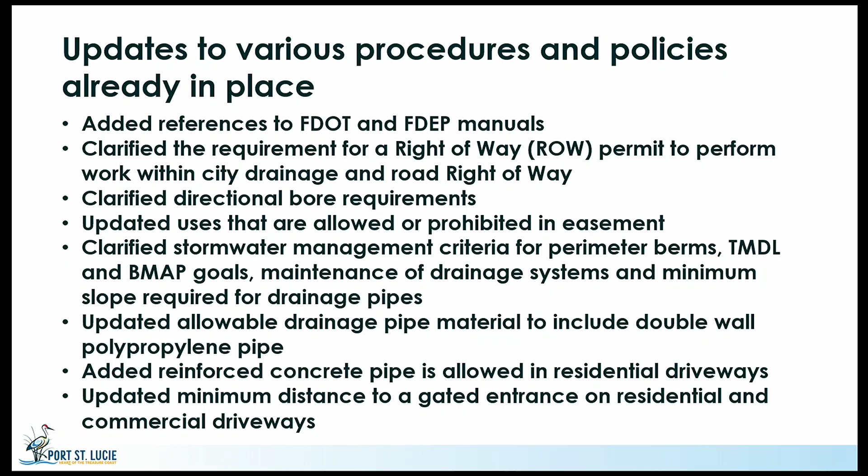The significant changes to roadways, I'm just going to go through various sections. So for instance, this slide shows section 8.3, which is the network requirements. It provides a revision to roadway network requirements. So new roadways shall be extended to the parcel boundaries, and new developments need to connect to existing roadways.

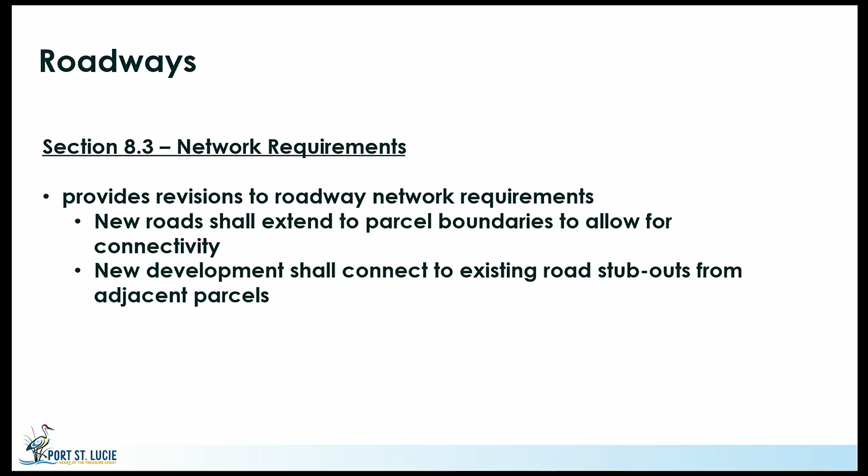Section 8.6, which is a roadway cross-section, we have updates to that to encourage using the average daily trips for roadway classifications, and also provides multimodal requirements by roadway classification.

The pavement design in section 8.7, we added clarification to adjustments to asphalt base and subgrade thickness. We've had that as a requirement for each of those, but sometimes we've noticed that depending on some designs, either thicker asphalt or adjustment to the base was needed, so we've made some clarification on there.

And we also added the minimum structural number for a temporary parking lot as 1.61.

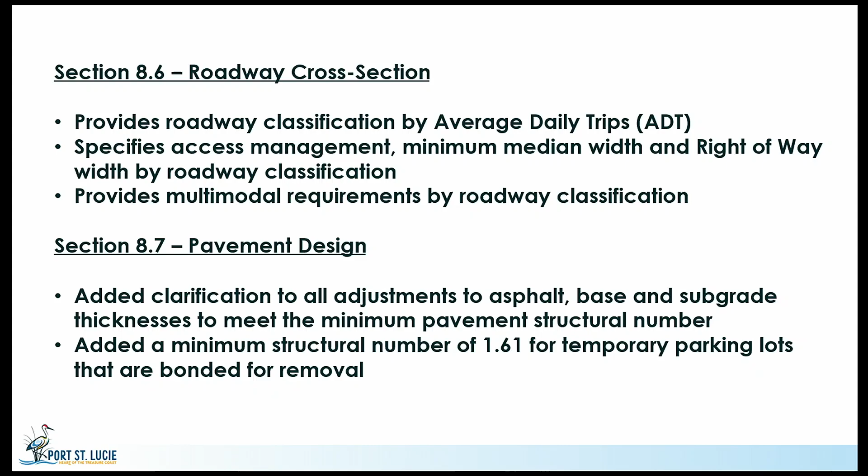In this roadway section for medians, we have 4-lane roadway, and any roadway with a design speed of 35 miles per hour or greater is going to require a median. And we also updated the 2-foot paver band, which was called for before. We've changed that to a 2-foot wide concrete band and provide the color and pattern for that concrete band.

Section 8.10 and 8.11 is the intersections and modern roundabouts. We've updated the reference to FDOT design manual, intersection control evaluation manual, and the FDOT NCHRP report 672.

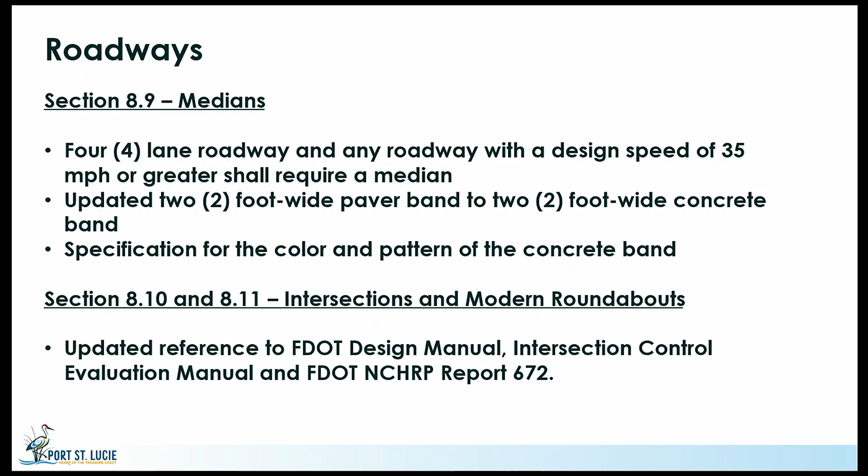On the driveways, section 8.12, we've added that the street light is required when connecting a driveway to a collector or arterial roadway.

Irrigation sleeves is required for all driveways within a public roadway.

We updated the FDOT standard plan index for driveway geometry, updated the requirements for tooled joints on concrete sidewalks. We also added the requirements for forming the residential concrete driveway, including saw cutting the existing edge of asphalt, and providing hot mix asphalt repair. That's primarily on residential driveways.

We added code reference for the number of access points required for residential subdivision, and we also updated the NCHRP reference for left turn lanes.

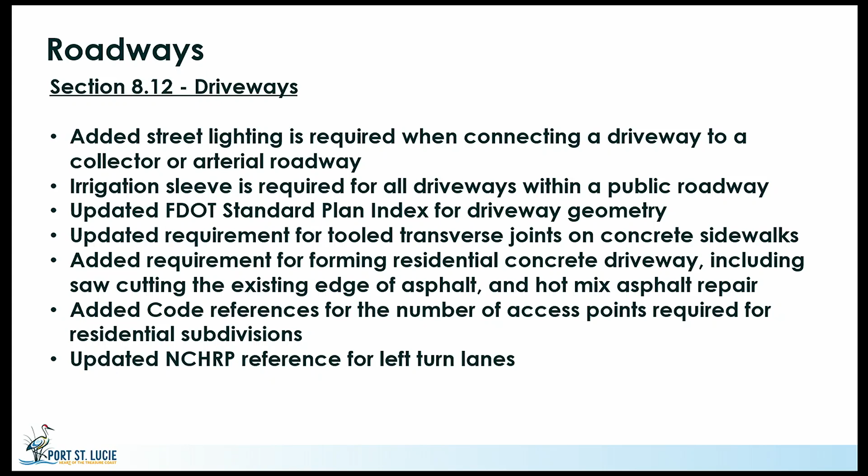On the sidewalks, which is section 8.15, we clarified the minimum sidewalk width if a sidewalk is located adjacent to the back of curb or the edge of pavement.

We also added a minimum thickness for concrete sidewalks within 5 foot of a driveway and within the access crossings to utilities or stormwater management facilities.

We added a 4-foot minimum sidewalk width for curb ramps, landings, and sidewalk crossing driveways. Also mentioned the transverse joints is supposed to be tooled, not saw cut.

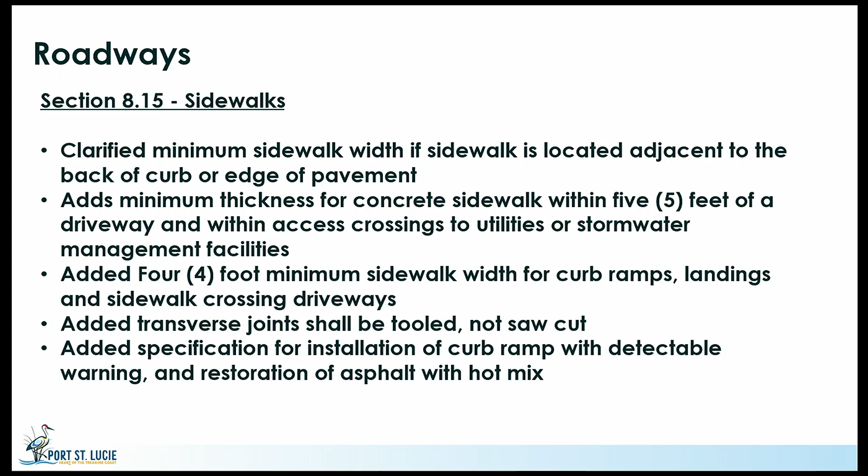And added specifications for installation of curb ramps with detectable warnings and restoration of asphalt.

And finally, on roadways, the mobility plan, we added a section, that's the new section, mobility plan, and the link to the city's website.

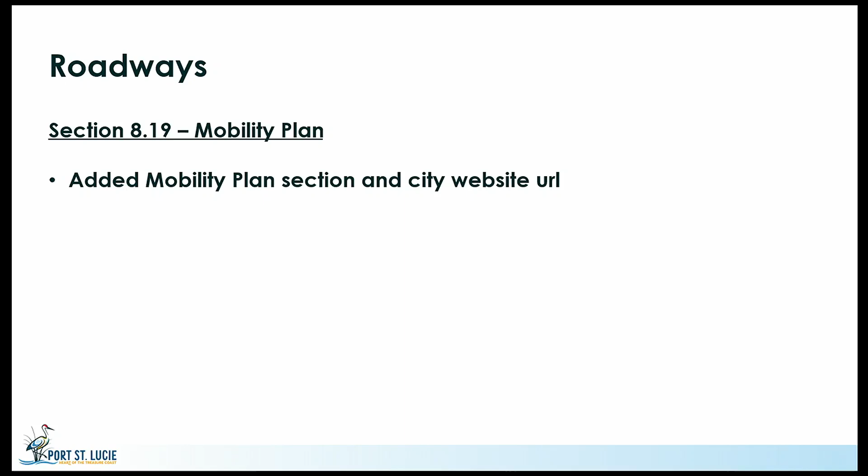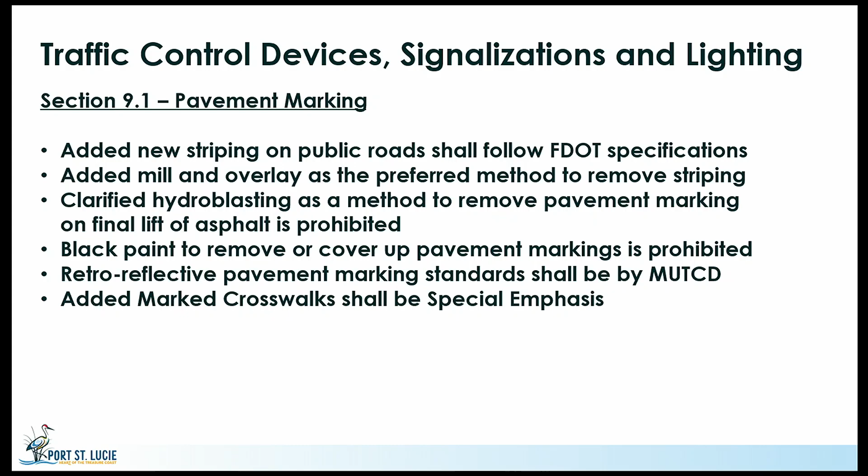On the signage, section 9.1.2, we added sign general criteria as well as requirements for driver feedback signs.

Section 9.2, which is signalization, we added the condition and specifications for temporary span wire assemblies, and added controller assembly for the cabinets and various requirements for signalization.

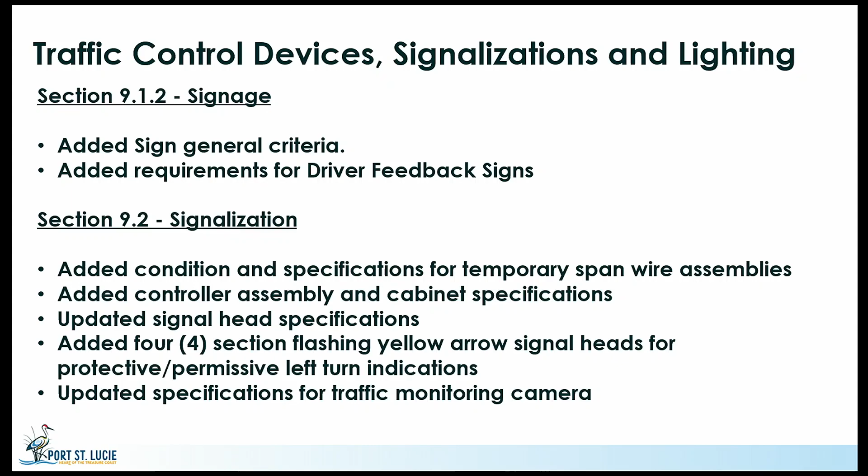We also added, that's a continuation of signalization, added the accessible pedestrian signals qualification, specifications for construction material of all new signal heads.

We also added a specification for treatment of pedestrian crosswalks at mid-block and unsignalized intersections.

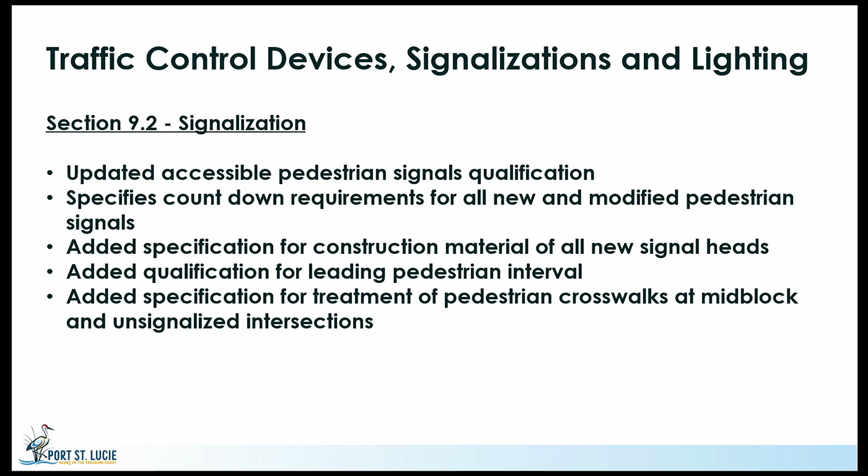We had some general updates for landscaping and irrigation, also bicycle and pedestrian facilities.

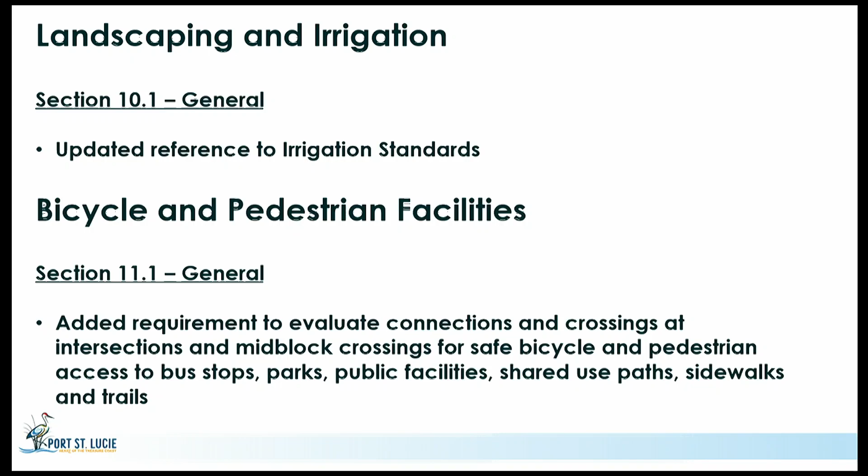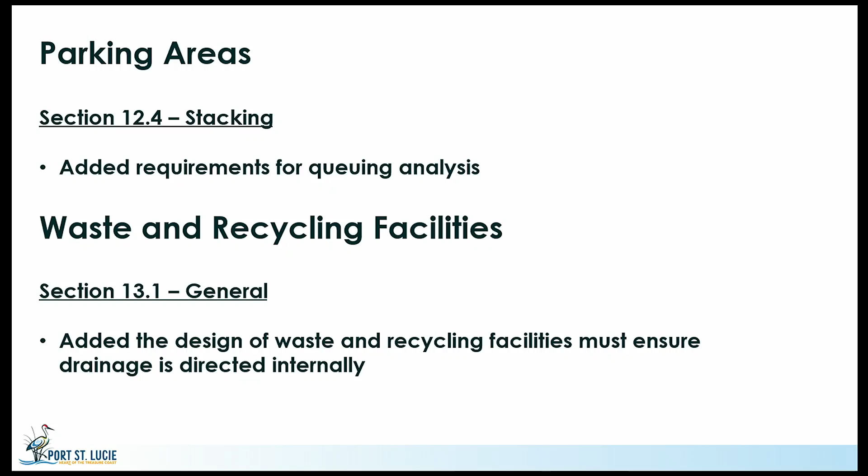For parking areas, we verified the stacking requirements in private parking also on private property. We also added a general note for waste and recycling facilities.

For submittals, we did some revisions. In the general notes, we added the requirements for revision clouds on the plans. Also added reference for the plat reviews checklist for plats.

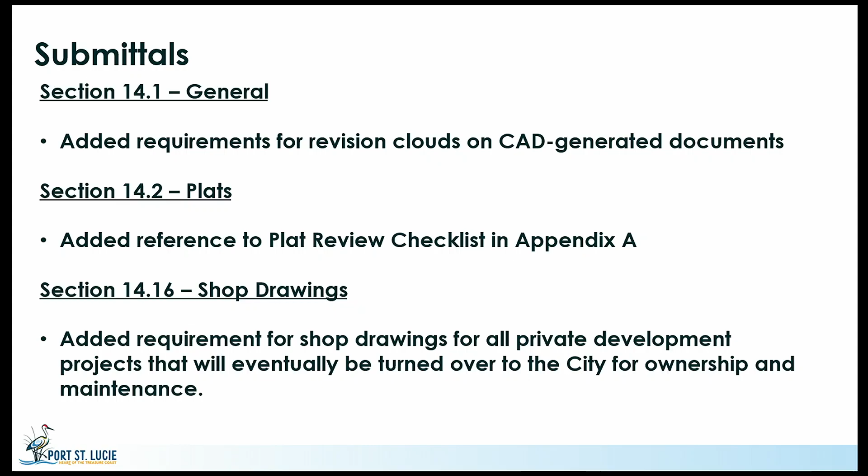Shop drawings, we added requirements for shop drawings for all private developments, and also for anything that's going to be turned over to the city for ownership and maintenance.

We made updates to the requirements for manuals, and that's for the operations and maintenance manuals that's required during the review.

Improvement guarantees, we added requirements to provide a guarantee on all work that's performed within the right of way, and also added requirements for work done in the city right of way as off-site improvements.

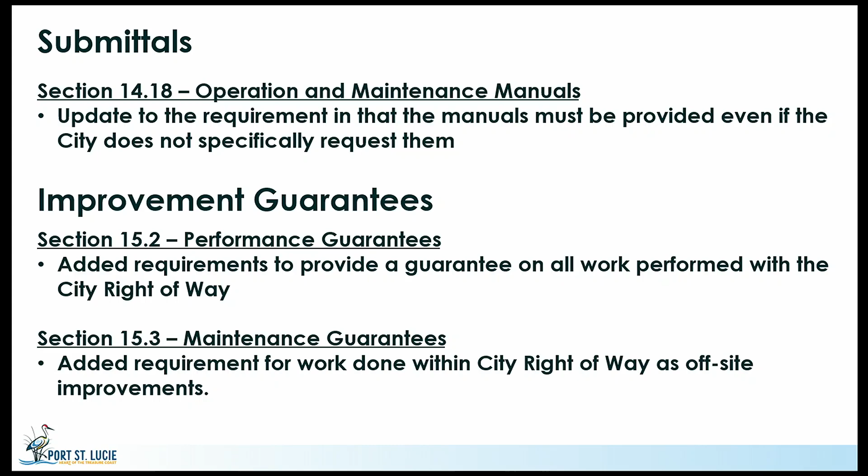In the permitting section, we made a few changes. Removal of specific response time for the issuing of a permit, as well as we extended the validity of a permit, from 6 months to 1 year for both mass grading and the site work permit.

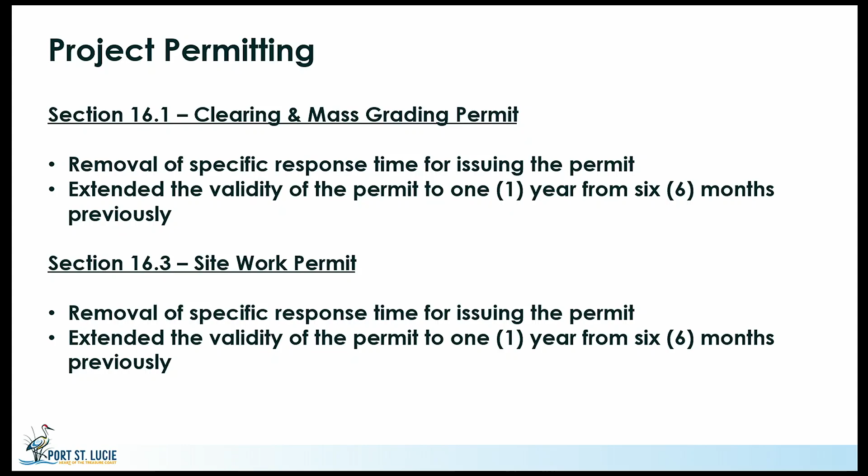Driveway culverts, we made some changes on there as well. We added the requirements for the third-party verification of authenticity of a survey.

We also added the requirements for 12-inch minimum temporary pipe to be installed within the right-of-way for any driveway that's coming in.

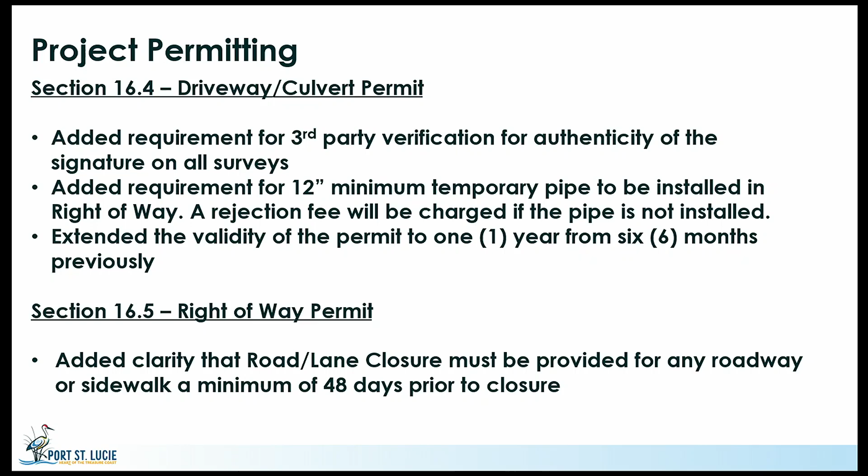We also added the clarification that the road lane closure must be provided for any roadway or sidewalk work a minimum of 48 days before the closure is done.

Our construction standards, we also did a few changes on there. We added requirements for construction entrance to be located on the most minor roadway.

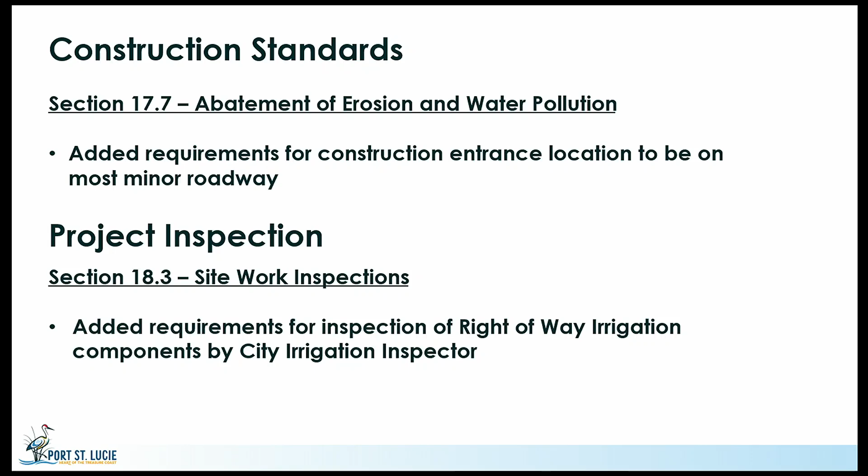We also made changes to add the requirements for the inspection of the road right-of-way irrigation components by our city irrigation inspector.

And for roadway turnover, we had recommendation for submitting the turnover documents ahead of time for review prior to submitting for the official request.

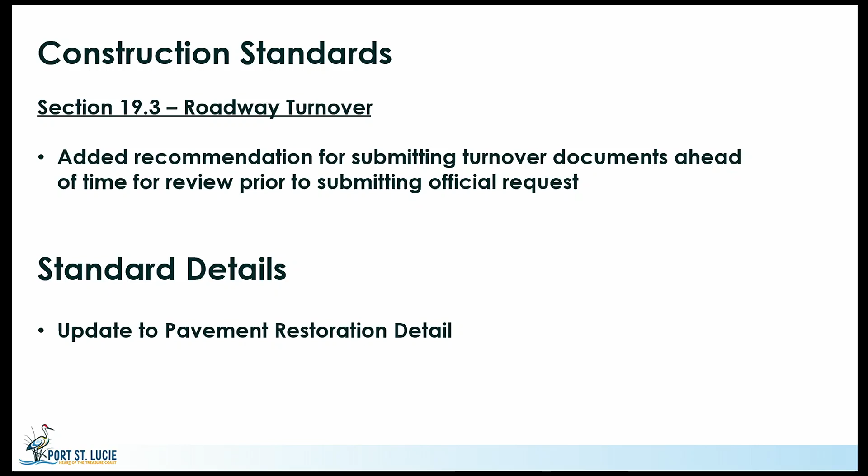That concludes the revisions that we made. So now we can open it up for any questions.